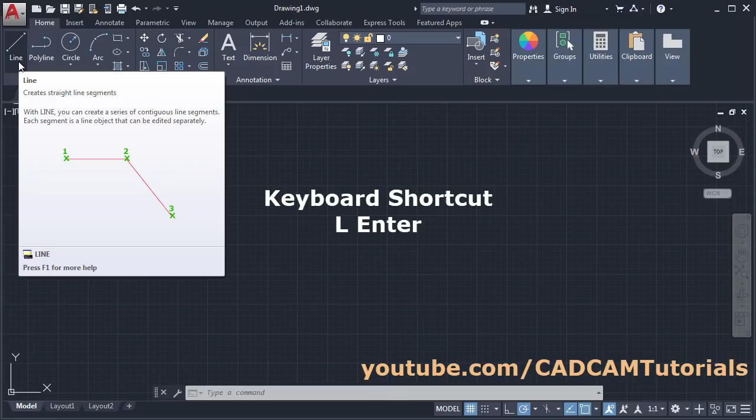Once you give the command, then you will have to read the message here. It is asking to specify first point. If the message is not shown at your cursor, that means your dynamic input is off.

If you want to show the message at the cursor, then you will have to make dynamic input on. To make the dynamic input on and off, you will have to click here on these three lines, customization, then click here on dynamic input.

Then it will show that dynamic input here. If it is in blue color, that means it is on, and if it is in black color, that means it is off. If I click on it, it will become off, then it will not show any message around our cursor.

For our series of tutorials, I recommend you to keep this on so that the message will be shown at the cursor. And if the message is not shown at the cursor, then you can read those messages from this command line area also.

Now in the line command, we will have to specify the first point, so you can click anywhere. I will click here, then take your cursor away. Now here it is showing the line horizontal automatically. It is showing it because our polar tracking is on.

If we make this off, then it will not show a straight line. To show that straight line, we will have to make this polar tracking on so that it will show a straight line also, and an inclined line also.

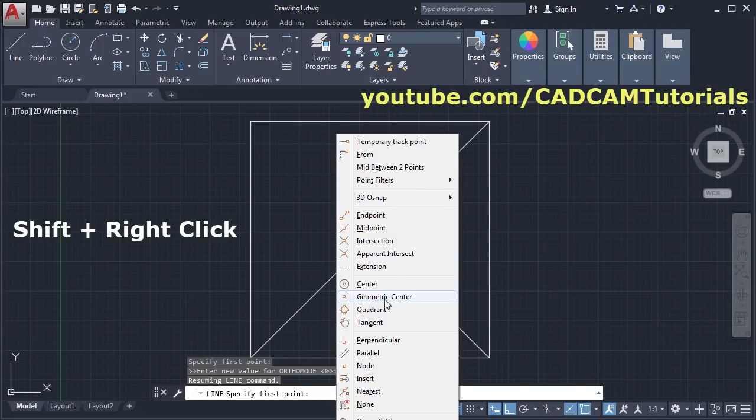Suppose I want to create lines from the midpoint of this line to the midpoint of this line. Again click on line, take your cursor here - it is not showing the midpoint. Again press shift and right click and select midpoint object snap. Then take your cursor here, it is showing midpoint - for midpoint it shows a green triangle. It shows different shapes for different object snaps. So click there. Now we are selecting object snap manually by pressing shift and right click.

But if you want to select the object snap automatically, click on this arrow near the object snap, and from here suppose I want to select this midpoint object snap automatically, click on midpoint, so it will add a tick there. That means it will select that object snap automatically. The object snaps which have a tick before them are selected automatically, and the ones without ticks need to be selected manually using shift and right click.

Then click outside and take your cursor here. Now it is showing midpoint object snap automatically. So once it shows the midpoint, you just have to click there.

And to stop the line command, press enter. So in this way you can select manual object snap or auto object snap.

If you want to remove some unwanted objects, then you can use the erase command. Keyboard shortcut for erase is E enter. Click on erase, then you can select the object you want to remove. Just click on them. Once you have selected all the objects, press enter, and those objects will be removed.

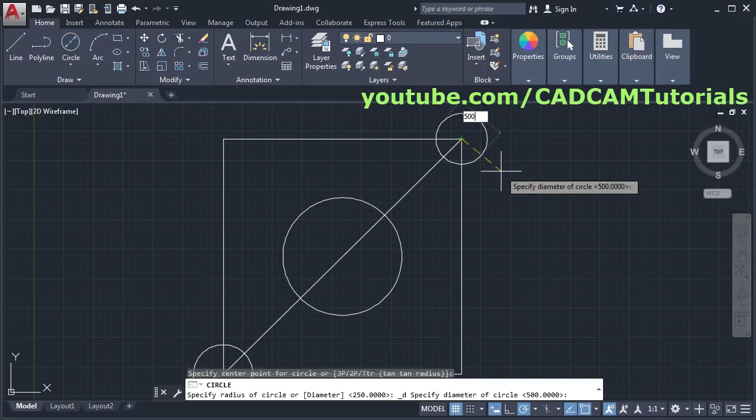If you want to zoom, for zoom plus rotate your middle mouse button or wheel of the mouse towards the monitor, and for zoom minus rotate the middle mouse button towards you.

Suppose I want to create one line tangent to these two circles. For that again click on line, then for selection of tangent object snap, press shift right click, and select tangent, then click on the circle. Again for selection of tangent here, shift right click, click on tangent and click on the circle. To stop the line command, press enter.

You can also select the tangent object snap automatically. Click on this arrow and click on tangent. Click outside, again take the line command, take your cursor here. Now it is not showing tangent object snap, but it is showing center. So we will have to turn off the center object snap. Click on center, so it will be turned off for auto selection. Then take your cursor to the circle, it is now showing the tangent. Click there, again click enter.

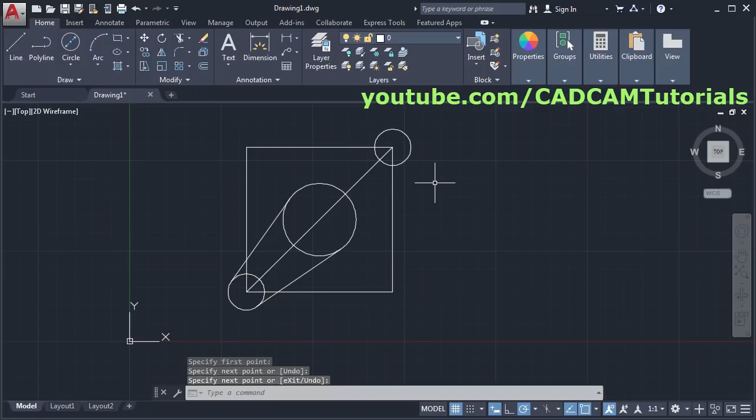If you want to repeat the previous command, press enter. Now it is repeating the line command. Again you can click the point and create the lines. Just enter to repeat the command and enter to stop the line command. So in this way you can create tangent lines.

If you want to create lines from the quadrant of the circle, you will have to make quadrant on. Then take the line command, take the cursor to the quadrant, and you can create lines from the quadrant also. Press enter.

If you want to cancel the last command, click here on undo. By clicking on this undo, you can cancel the last command. And if you want to bring back the object again, click on this redo. But for redo, you will have to click it immediately without giving any other command. If after undo you do some work, then it will not redo it.

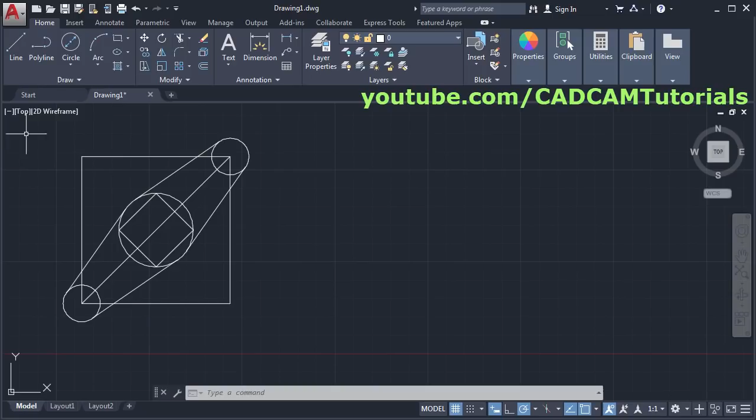The next topic is to create a line at an angle. For that we will open one reference drawing, this angle concept. In AutoCAD, the angle is measured in this way. If you are moving your cursor in the right direction, the angle is 0. The vertical line angle is 90 degrees and the line on the left side is 180 degrees. The same case is below: if you are going below, the angle is 90 degree. That means on the upper side 0 to 180 degrees and on the below side also 0 to 180 degrees.

Suppose I want to create one line at 30 degree angle. You will have to specify the 30 degree angle during creation of this line. Suppose I want to create one line in this direction and the angle is 30 degree from this 90 degree. Then I will have to specify the total angle from the 0, not just this 30 degree angle. If I specify 30 degrees, it will create this line and not that line. For creation of this line, you will have to specify the total angle of 120 degrees.

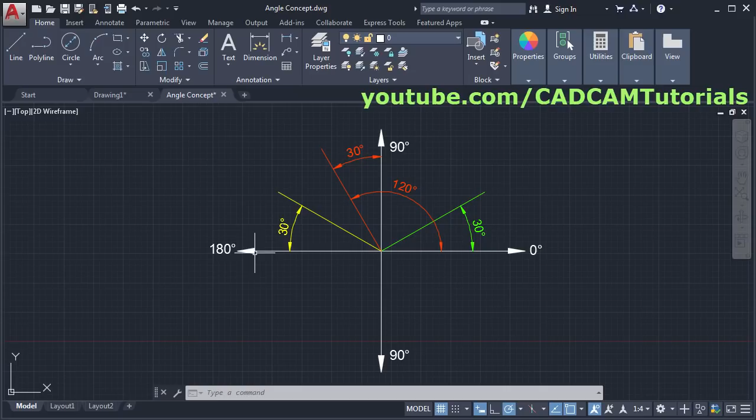Same way, if you want to create one line in this direction with angle required 30 degrees from this 180 degrees, you will have to specify this total 150 degree angle and not this 30 degree. That means you always have to specify angle with respect to 0 as per your requirement. Same is the case for below angles. If you want to go in this direction, you specify this 30 degree angle. Then if you want to go 30 degrees ahead of this 90, you will have to specify 120 degree angle.

If you want to go in this direction, you will have to specify a 150 degree angle, so the angle on both sides is the same.

The direction of your line can be decided by your cursor movement. Suppose I want to create a line from this point, and if you take your cursor above, the angle will be measured on the upper side, and if you take your cursor below, the angle will be measured from the bottom side. Suppose I want to create a line in this direction.

For angle, first you specify the length of the line. Suppose length is 20, then press tab on the keyboard for specification of angle. So press tab, and it will take your cursor to angle. Then specify the angle here, suppose 30, and press enter. So this line is created in this direction, like this green line.

Suppose I want to create a line in this direction at an angle of 30 degrees from this vertical line. Again, first specify the length, which is 20, then press tab. As I want to create the line at an angle of 30 degrees from this vertical line, I will have to specify the total angle, which will be 120 degrees. So specify 120 degrees here, and it will go in this direction. If you specify 30, it will again go in the same direction.

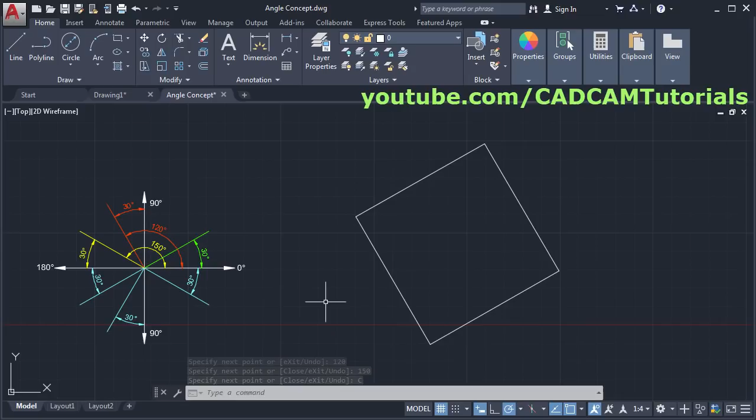If you want to save this drawing, click here on the save button, click on save. Then choose your desired location, I want to save in documents. Then give the desired name, suppose lecture 1, then click on save. So that drawing will be saved by that name in that folder.

And if you want to close this drawing, click on this X here. It will close that particular drawing.

If you want to start a new drawing, click here again and select the desired template so it will start the new drawing. And if you want to see a previously created drawing, click on this open button, click on open, then choose your drawing and click on open, so it will show the previously created drawing.

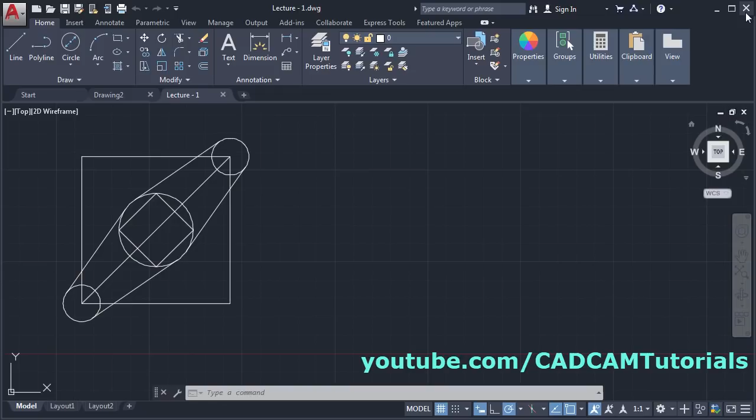And if you want to close AutoCAD, click here on this X. Then it will close AutoCAD. So that's all for now.

Now in this tutorial, we will learn how to create a drawing in imperial units, that is feet and inches, and we will also learn more basic commands. To create a drawing in feet and inches, click here and select acad.dwt, click on it.

Then give the units command. Type UN, enter. For feet and inches, you will have to select architectural or engineering. First we will see how to use engineering, click on engineering. Then from here you can choose the required precision. The insertion scale will be inches, and I will keep this precision as it is.

Then click on OK. Then we will create one line in feet and inches. Click on line, give the first point, take your cursor away, and for a straight line click on polar tracking. Suppose if I put a single number, that value will be in inches. Suppose if I put 20 here and press enter, it will be considered as 20 inches. We can check it, press enter to come out of the line.

Then to check the length of this line, make quick properties on, right now it is off. Click on it, it will become on. If in your case this quick properties button is not shown here, you will have to click on these three lines for customization, and click here. By clicking on it, you can make it visible or invisible.

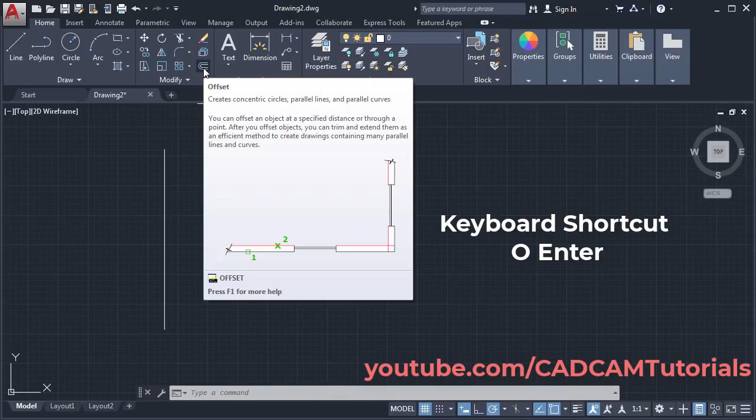Click on offset. Then you will have to specify distance. What is the gap between two objects? Suppose gap is 500. Then press enter. Then select object to offset. I want to offset this object. Then take your cursor on the side where you want the offset. Suppose I want offset on this side, so take your cursor on this side. You will have to specify the point on side to offset. For that you will have to click. Now this offset is created at a distance of 500.

Offset command is still running. Suppose if I again select this line, you can create offset at a distance of 500, or you can also change that value. Suppose now I want offset at a distance of 1000. So put there 1000 and press enter. Your offset is created at 1000 distance. Again select this line.

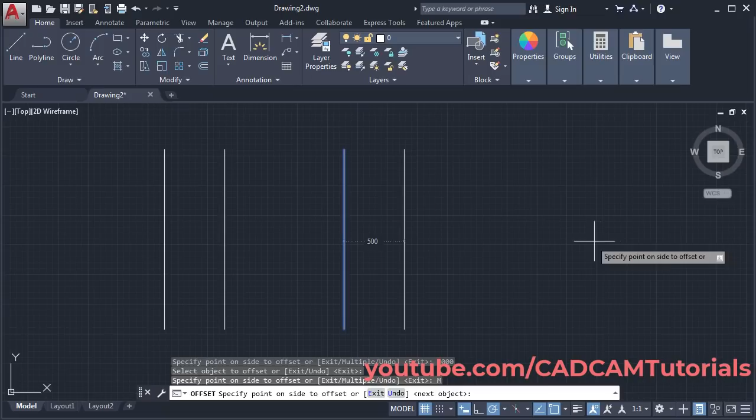Then if you want to offset multiple lines at a distance of 500, then you will have to click on this multiple option. Click on multiple. Take your cursor on the side where you want the offset and click, and you will have to keep on clicking. As many times you click, that many times it will create the offset. And if you want offset on this side, you can click on this side also. Then to stop the command, press enter. In this case, you will have to press enter 2 times. By first enter, it will come out of the multiple mode, and then by again pressing enter, it will come out of the offset command.

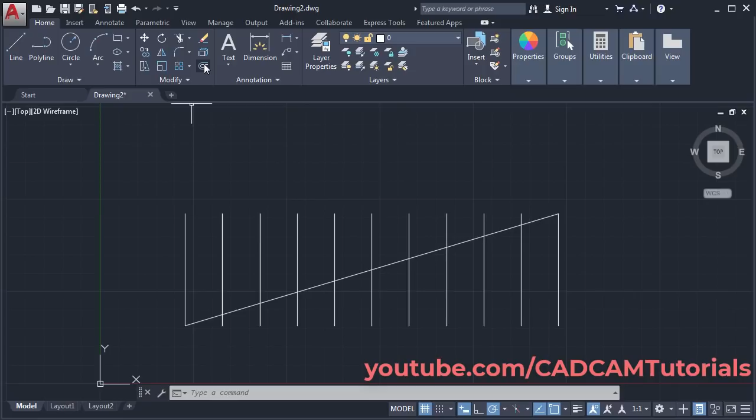Now we have created offset with some specified distance. Suppose I want to create offset by specifying a point. Then how to do that? That we will see. Suppose I will create one line from this point to this point. Press enter. Now I want to create offset by specifying a point. Suppose I want to create offset to this line passing through this point. And for that again click on offset. Then you will have to click on through.

Select the object to offset, then you can specify the point. I want the offset passing through this point, so just click on that point, and it will create an offset passing through that point.

This through option is also useful for creating variable length offset. Suppose if I click on this line, as you take away your cursor, the length changes. Here you can specify your desired length. Suppose I want 200, enter.

Again, suppose I want an offset at a different length, take it away. Suppose I want it at 500, enter. Again, suppose from here I want it above at 300. So in this way you can use this through option to create variable distance offset also.

If you want to create an offset and erase the original line used to create it, click on offset and use this erase option. Click on erase, then click on yes, erase source object after offsetting, yes. Then specify the distance, suppose 500, enter.

Select object to offset. I want to offset this object. Then give the direction where you want to offset and click. So here you will see that the original line got erased and only the offset line has been kept. Then press enter to stop the offset command.

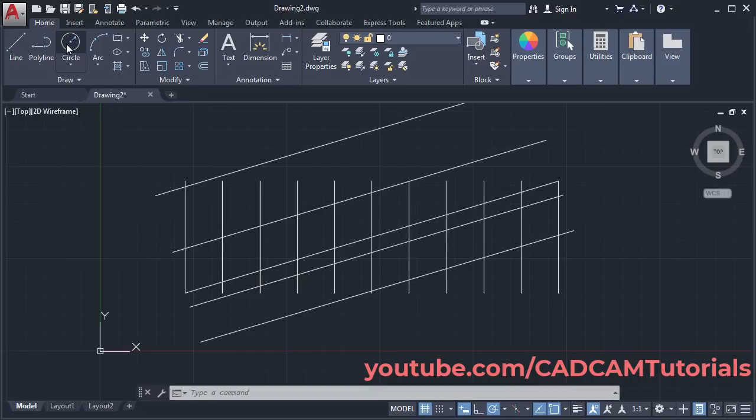You can also use offset to create concentric circles. Click on circle, give the center point, give the radius. Then if I offset this circle, click on offset, then give the distance 200, enter.

Select object to offset. I will select this circle. If you take your cursor outside of the circle, the radius will increase by that offset distance. And if you take your cursor inside the circle, the radius will decrease by that much distance. Then click inside. Now our erase option is on, so that outside circle got erased.

So first we will have to turn that off so it will not be erased. Press enter - you can repeat the last command by pressing enter. Press enter, click on erase, then select this no option.

Then again give the distance 200, enter, select the circle, then take your cursor outside and click. If you click outside, the radius will increase by the offset distance. And if you click inside, the radius will decrease by the offset distance. Press enter. So in this way you can use offset for creating concentric circles.

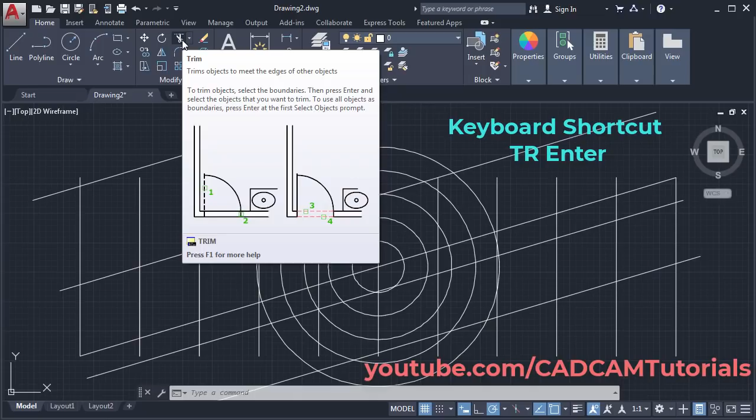Then I want to remove this arc above this line. If you want to remove or cut some object, you will have to use the trim command. The keyboard shortcut for trim is the first two characters, that is TR. You will have to type TR, enter.

Click on trim. Then for trim, first you will have to select the reference edges - that means the edges with reference to which you want to cut the object. So I want to cut with respect to this line, so I will select this line, then press enter.

Then select object to trim. I want to trim this circle. Click there, so that much of the circle will be trimmed. So now this line is selected. You can trim other objects also.

And if you want to trim multiple objects, you will have to click in empty space and take your cursor to the left side - that means click on the right side and take your cursor to the left side. So whatever object has been crossed will be trimmed. Click there, so three lines and this circle have been trimmed. Then to stop the trim command, you will have to press enter.

Then you can also define all objects as cutting edges. For that, click on trim, then to define all objects as cutting edges, you will have to press enter. Just press enter, so all objects will be defined as cutting edges.

Then you can remove any object. Just click on the object you want to remove, so that object will be trimmed. You can also use a crossing window. Just click on the object you want to remove, so it will be removed.

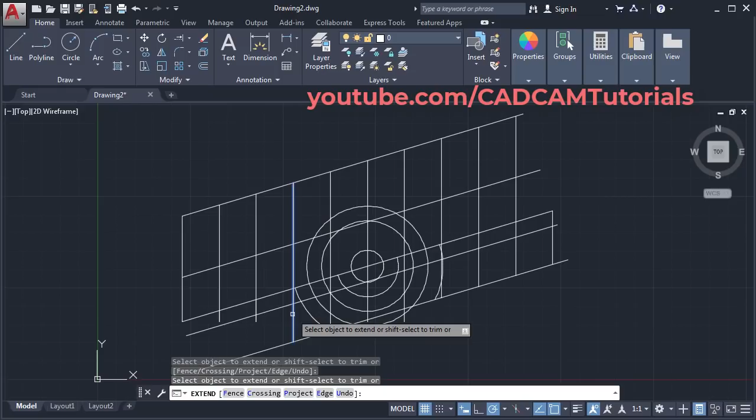You can also use extend as a trim. If you want to use extend as a trim, the process is same. You will have to press shift and then click on the object you want to trim. In this way you can use extend also as a trim. Then to come out of the extend command, press enter.

Suppose if you want to measure the length of this line, take your cursor to utilities, take your cursor on this arrow and click on distance. Then click the first point and second point of that particular line. Click outside. So here it is showing the actual length of that line.

Then it is showing length on the y-axis, that is vertical length of that line, and length on x-axis, that is the horizontal length of that line. And it is also showing angle from the x-axis.

Then if you want to see the radius of the circle, click on radius, click on the circle. It will show the radius and diameter of that particular circle.

For angle, click on this angle, then select the two lines for which you want the angle. Here the angle is shown as 73 degrees. Again click on angle, zoom minus to show it completely, and click on the two lines. Suppose I select this line and this line. So here it is showing the angle of 73 degrees.

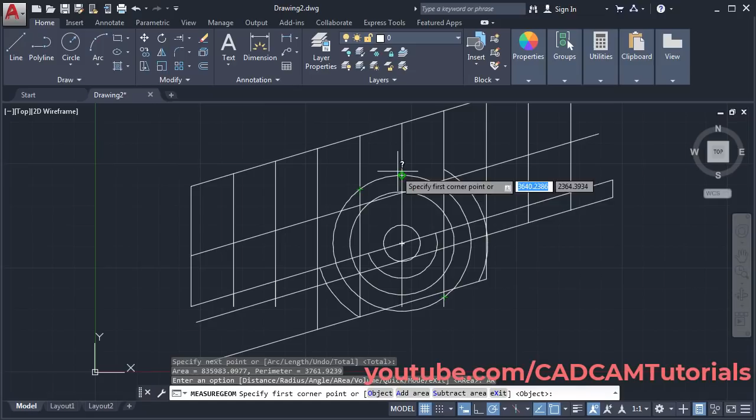And if you want the area of the circle, then click on area. Now for circle there are no points to click. Then for circle you will have to use this object option. Click on object and click on the circle. So it will show the area and circumference of that particular circle.

Then to come out of this measure command, you will have to click on exit. Then suppose if you want to calculate the area for the combination of arc and lines, we will see how to do that. Take your cursor to utilities, click on this arrow. From here also you can give directly the radius, angle and area command.

I want to measure area, then give the first point. I want to measure area for this shape. It contains two lines and two arcs. So we will start with this line. I will give this first point, this second point.

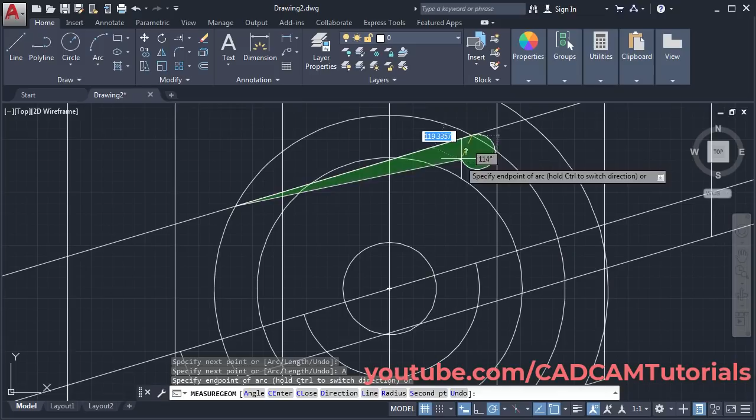Then there is this arc entity. To specify the arc entity, click on this arc option here. Then I know the center of this circle, so I will choose this center option, specify the center of the circle. Then to reverse the direction of the arc, here it is showing hold control to switch direction. Just press and hold the control, so it will switch the direction. Then click this point, release the control.

Then I want to specify this line. For that click on this line, then click this point, again click on arc. Then again I will choose this center option, give this point as a center. Then again press and hold control to change the direction and click on this point. Release the control and press enter. So now here it is showing the area and perimeter for this marked shape, the green shape. Then to come out of this command, click on exit.

Now in this version of AutoCAD 2020, they have added one more option for measurement, that is quick. Click on this arrow.

Here is the quick option. In quick option, you don't have to click anywhere. You just take your cursor to a portion and it will show all the parameters from that portion. So here you can view that it is showing all the angles and the length of the surrounding lines. Just take your cursor to the area where you want to do the measurement.

There is no need to click there, you just take it there and hold it for some time. Now it is showing the length of two lines, angle and radius. So this is a quick way to do the measurement, but it is available only in version 2020 and not available in old versions.

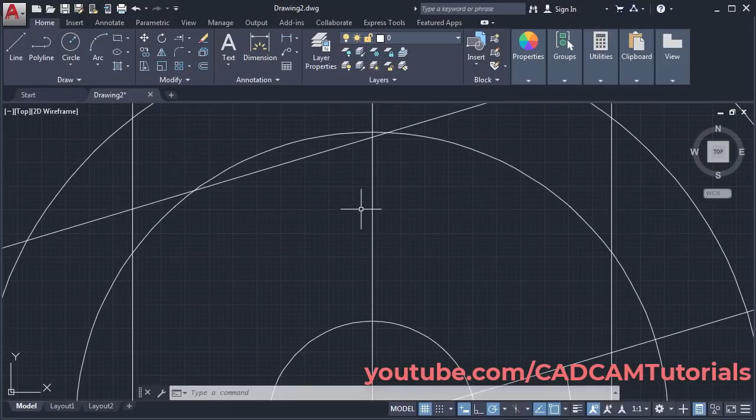Press escape to come out of the command. Then we have seen zoom and pan. For zoom, you will have to rotate your middle mouse button or wheel towards the monitor, so it will zoom plus. If you rotate the wheel towards you, that will make it zoom minus. Then if you press the middle mouse button and drag the mouse, it will pan.

And if you want to zoom extend, just double click the middle mouse button. It will zoom extend the drawing. Then there are some more commands.

Now here the navigation bar is not shown. To make it visible, click on view and click on navigation bar. So it will show the navigation bar. Click on home to come back to the original menu.

Then here some more zoom commands are there. Click on this arrow, there is zoom window. Click the first point, click the second point, and that much area will be zoomed. Then there is zoom previous, it will show the previous view.

Then there is zoom real time. For that you will have to press the first mouse button and drag the mouse. Then it will zoom plus if you take your mouse above, and if you take your mouse below by pressing the first mouse button, it will zoom minus. If you want to switch to pan, just right click and click on pan. Then press the first mouse button and drag the mouse, so in this way you can pan it.

Right click, zoom window is also there. Just press the first mouse button and drag the mouse, so it will zoom that much window. Again right click, zoom extend, and all the drawing will be shown in a single window. To come out, just right click and exit.

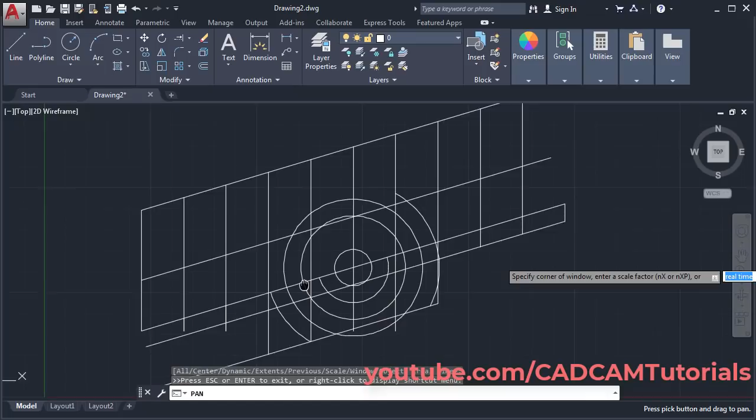You can give directly the pan command from here. Click on it, and from here you can pan it. Press the first mouse button and drag the mouse. Right click and exit, then escape.

That's all. In this tutorial we will learn the layer concept. In draw commands we will learn ellipse and polygon, and in modify commands we will learn fillet and chamfer. Let's start with layers. In this drawing you can see that different line types and different colors have been used.

To create a drawing like this, you will have to create different layers like this. So in this tutorial we will learn how to create these layers. We will start a new drawing using ISO template or acadiso. To create new layers, here is the layer command, layer properties. The command name is layer and the keyboard shortcut is LA, enter.

Click on layer properties. By default, AutoCAD works on the 0 layer. To create a new layer, you will have to click here, click on new layer, then you will have to give a proper name to the layer.

You can use the logic of line types, like giving the layer name as outline, center line, hidden line, or you can give a name as per the thickness you are going to use, like thickness 0.5, thickness 0.3. If you are creating a civil plan, you can give names like wall, window, doors. So the name you specify here should be meaningful. Suppose I will name it as continuous.

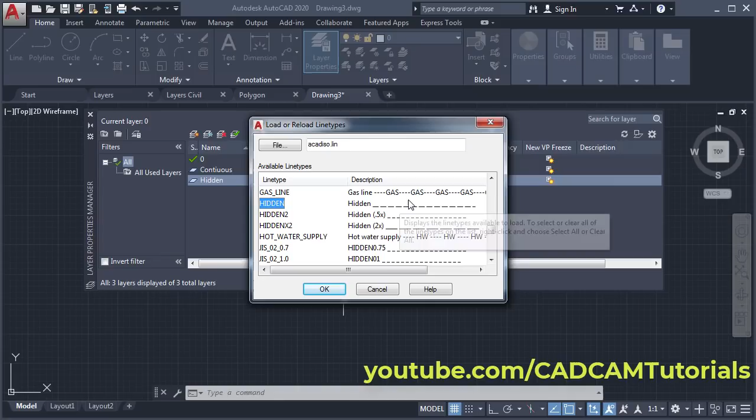Right now hidden line type is not available here. You will have to click on load, then scroll it down, and here is the hidden line type. There are three types of hidden lines: one with larger size, that is 2x, one medium size, and one smaller size. Suppose I want to use this medium size hidden line type, and click OK.

Then select hidden and click OK. Now our hidden layer has hidden line type, and I don't want any thickness, so click here and click on default, OK. Then I want to create one more line type, that is center.

For that again click on new layer, then give the name as center, then choose the color, OK. Then here line type required is center. Click on hidden, click on load, then scroll it down, and here is center. OK. Again select center and OK.

Now 0 is the AutoCAD default layer, and we have created three more layers. If you make any mistake during typing the name of the layer, you can change it. Just select that name, and after some gap click there again, so it will go into editing mode, and from here you can make any changes you want. Once you have edited the name, click outside, so that name will be changed.

And if you don't want any layer, you can delete it also. Just select the layer and click on delete layer. But the layer you want to delete should be empty, meaning no object should be created using that particular layer. If you have created any object on that layer, you will have to change the layer of those objects and make that particular layer empty. Then only you can delete it.

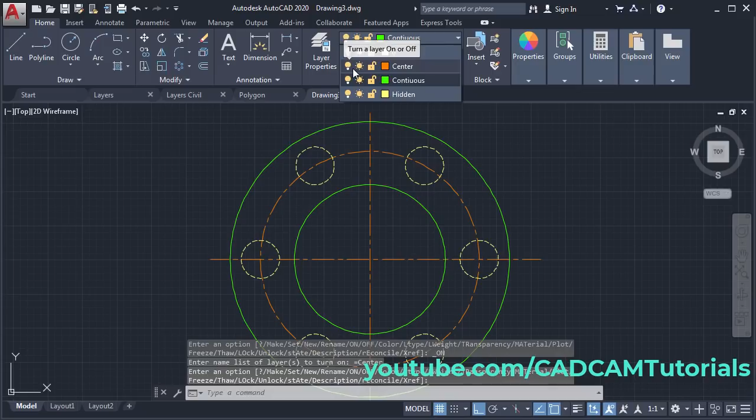Same way you can make any layer freeze or thaw. If you click on it, it will be made invisible again. But the benefit of freeze or thaw is that those objects will not be considered in regeneration. If you have a very large drawing, instead of turning it off, you should always use freeze, so that those objects will not be used in regeneration and your drawing will work faster. By clicking on it again, you can make it thaw or visible.

Same way you can lock some layer. Suppose if I lock this hidden layer here, then on a locked layer no modify commands work. Suppose if I say erase, select all the objects and press enter, so all the objects are erased, but the objects that were on the locked layer are not erased.

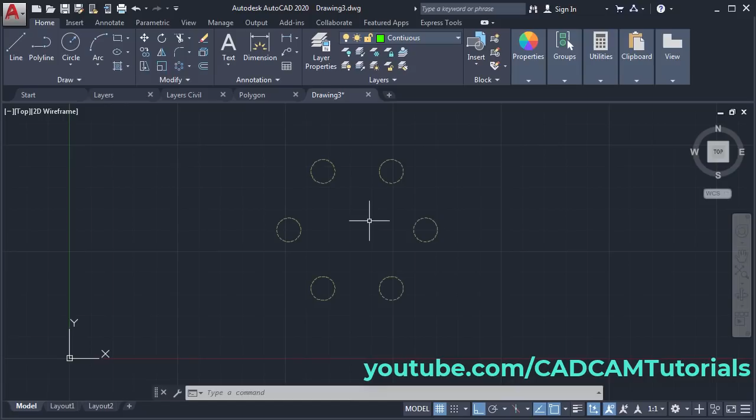By locking a layer, you can prevent accidental modification. If you want to take some drawing for reference, you can lock that and work on that particular drawing. To bring it back, I will just undo it, and from here I will make this hidden layer unlock. So in this way, you can use layer commands.

Next we will see the ellipse command. Here is the ellipse command, keyboard shortcut EL, enter. Click on ellipse, then you will have to specify the center of the ellipse. Suppose I want to create an ellipse here. Click there, then take your cursor away.

If you want to specify the axis of the ellipse as straight, you will have to make ortho mode on, and if you want to create an inclined ellipse, you will have to make it off. Suppose I want to make it straight, so I will keep it as it is. Then give the direction for which radius you want to specify - suppose horizontal radius. Take your cursor away and give the radius, suppose 700, enter.

Then it asks to specify distance to the other axis - here you will have to specify the other radius. Suppose I want the other radius to be 900, enter. So here a vertical ellipse is created.

Again click on ellipse, give the center point. Suppose I want to create an inclined ellipse, then I will make ortho off, take my cursor away, and specify the length of the axis, suppose 600. Then to specify the angle you will have to press tab on keyboard. Press tab, then specify the angle for the ellipse, suppose 45 degrees. Then press enter, then specify the radius of the other axis, suppose 1000.

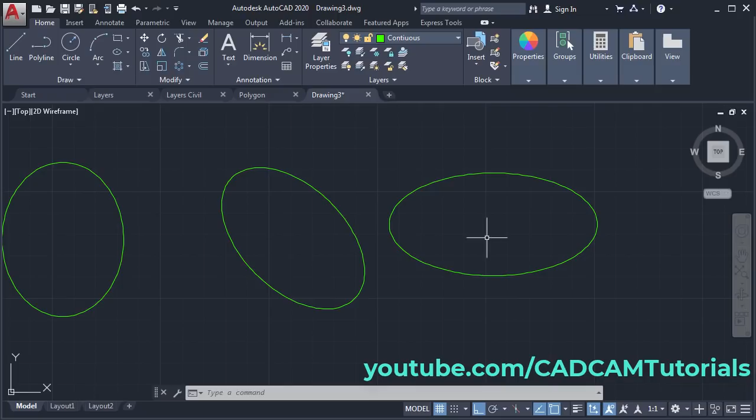Then next is polygon. Click on this arrow near the rectangle command, and here is the polygon command. Keyboard shortcut for polygon is POL, first three characters. Click on it, then you will have to specify number of sides. Suppose I want to create a polygon of 6 sides, type 6, enter. Then specify center of polygon. Suppose I want to create polygon here, so I will click there.

Then you will have to choose whether you want inscribe or circumscribe polygon. So how to decide what is our requirement or when to use which, that we will see. I will just press escape. And here is the polygon.

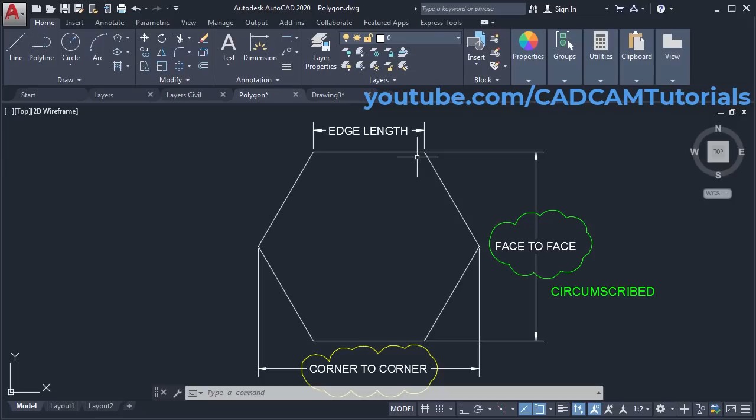So polygon dimensions can be specified in three ways. You can specify distance between two parallel surfaces, that is face to face, or you can define distance between two opposite corners, that is corner to corner, or you can directly specify the length of any one edge. In these three ways, a dimension can be given for polygon, so any one dimension will work. If the dimension given is face to face, then you will have to use circumscribed method. And if the dimension given is corner to corner, then you will have to use inscribe method. And for the edge length, edge method needs to be used. So in this way you can decide which method to be used based on the dimensions.

I will create one polygon, click on polygon. When you use some command, it comes on the top automatically. If we click on this arrow, we can see that polygon is the second command and rectangle is first command. But we have clicked there previously, therefore it came on the top automatically. So click on polygon, then specify number of sides.

Suppose I will give you 6 here, press enter. Then specify center of polygon. Suppose I want to create polygon by inscribe in circle method, click on it. Then take your cursor away. Make this ortho off so that it will show the message near the cursor. If message is not shown near the cursor, then you will have to see in this command line. Then specify the radius of the circle. If you observe it closely, the radius is specified from the center of the polygon to the one of the corner of the polygon. Then give the radius, suppose radius is 800, enter. So here this 800 distance is given from center of the polygon to the one of the corner of the polygon. That means this total length will be double, that is 1600.

Again click on polygon, then specify number of sides. Again I will give 6, enter. Then give the center point. Then next is circumscribed about circle. Click on it. Here you can observe that radius is specified from the center of the polygon up to the midpoint of your edge. Then specify the distance, I will give here 600, enter. So this 600 will be from the center of the polygon to the midpoint of any of the edge. That means total distance between two parallel lines will be double, that is 1200.

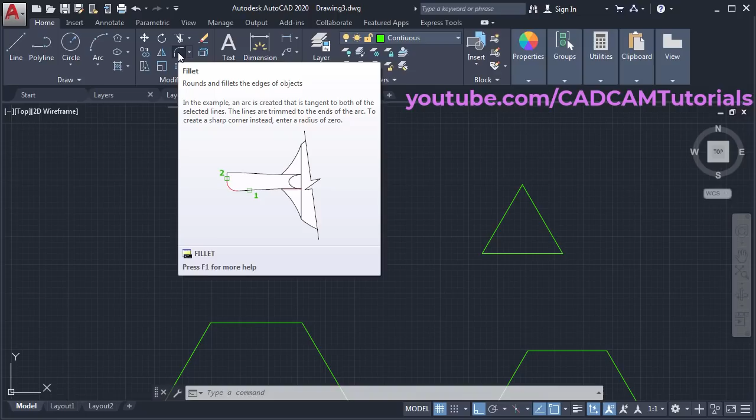Click on fillet, then select the first object. Suppose I want to create an arc between these two lines. I will select this line as the first object. Then you will have to specify radius. To specify radius, click on radius here, then give the radius. Suppose I want radius of 200. Enter. Then select second object. So in this way it will create an arc between two lines.

Again click on fillet. The keyboard shortcut for fillet is F, enter. Click on fillet.

Then there is one option called polyline. Using the polyline option, you can create fillet at all the corners of the polyline. As we have created this square, or we have created this triangle using the polygon command, whatever object is created by the polygon command is a polyline. So we will use this polyline option on this triangle. Click on polyline, then select this polyline.

We have set the radius of 200, so because of that distance it is actually creating a circle. So we will reduce the radius. Click on radius and make it 50, enter. Then take your cursor to this polyline. Here you can see that it has created fillet at all the corners. So if you have a polyline object, you don't have to use fillet multiple times. You just choose the polyline option and click on the object, and it will create a fillet for all the corners.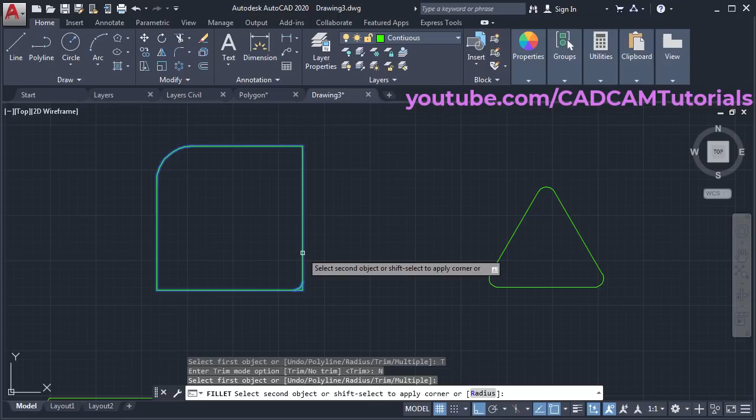Then there is this trim option. Here you can observe that the extra lines have been removed, because the trim option is on. If you want to keep those lines, click on trim, click outside, and click on no trim, so it will not trim the lines. I will select this line and this line. Here you can observe that the lines have been kept as is and the fillet is also created.

Again give F, enter. I will cancel this trim option. I will select trim again, so it will trim the lines.

Then there is one more option, multiple. If you want to fillet with the same radius for multiple objects, you don't have to give fillet again and again - you can choose this multiple option. Click on multiple, and we will change the radius also. Suppose I set the radius to 200, enter. Then you can select the object - click on first object, second object. Suppose here also I want to create some fillet. It will not stop until you press enter, and you can create fillet with the same radius as many times as you want. To stop, press enter. So in this way you can use the multiple option.

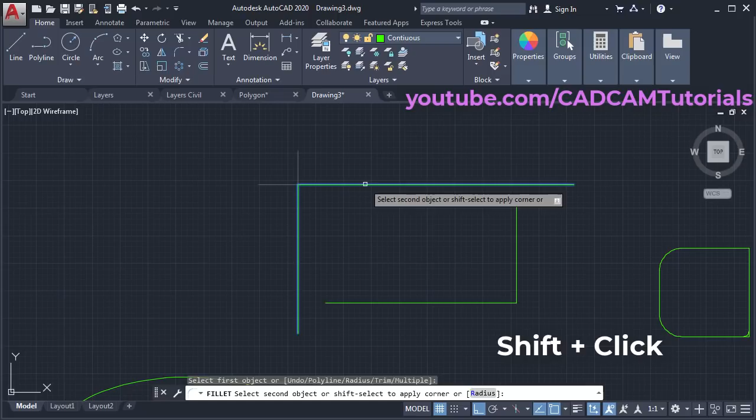Fillet is also useful to create corners or extend a line automatically. Suppose I have some object - now I have this object. Suppose I want to trim these two lines and create a corner here. For that you can use fillet. Click on fillet, then select the first object. If you take your cursor to the second object, it will create the fillet, but I don't want to create a fillet, I just want to create a corner. So for creation of a corner, just press shift and click. It will create the corner and not the fillet. Now these two lines have been trimmed.

Same way it will extend also. Suppose again I will give fillet, and I will choose this multiple option so I don't have to give fillet again and again. Fillet, then select this line, press shift and click. In this case this line has been extended and trimmed, and the corner has been created. So in this way, by pressing shift, you can create corners. This is how you use the fillet command.

And in the set of fillet tools there is one more command - click on this arrow, which is chamfer. The keyboard shortcut for chamfer is CHA, enter, the first three characters. Click on chamfer.

Most of the options are same as we have seen in fillet. Undo, polyline, trim and multiple, those are the same as we have seen in the fillet command.

For a chamfer, select first line. Then here you can specify angle or distance. Suppose I want to specify distance, click on distance, then specify first chamfer distance - that means chamfer distance on this first selected line. Suppose I want it to be 200, enter. Then specify chamfer distance on second object. You can keep the same and directly place here enter, or you can give different also. Suppose I want to keep it same, I will press enter, then select the second object. So here chamfer is created.

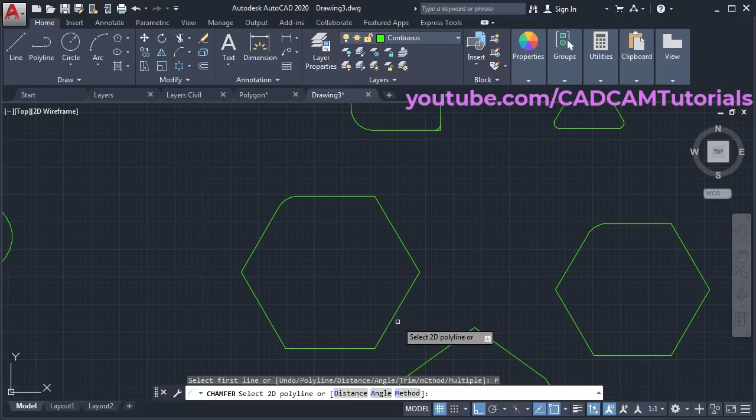And the polyline option is same, just we will try it. Suppose here chamfer, click on polyline, and now that angle is creating problem, we will choose this distance option and set the distance of 100, enter. Then other chamfer distance is 100, select this object. So here chamfer is created. So in this way you can use the chamfer command.

That's all. In this tutorial we are going to learn all the options from the circle command. Then we will learn about hatch, then mirror and object snap tracking. If you are interested in previous tutorials from this series, then link to the complete playlist is given in the description.

Click on the arrow below the circle command. We have already seen how to create circle using center radius method. Then next is center diameter. Click on it. In this, at first you will have to give the center point for the circle. Click center point, then take your cursor away. Then you will have to specify diameter of your circle. Suppose diameter is 400, enter. So it will create circle of 400 diameter.

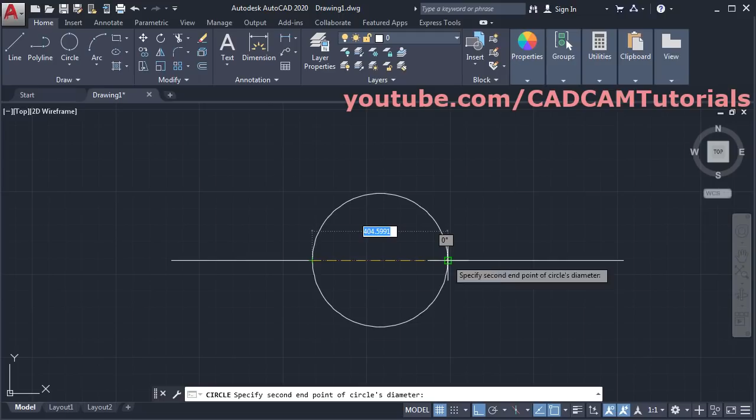Then next is 2-point circle. Suppose I will create one object, suppose I have this line and one more line. Suppose I want to create one circle passing through these 2 points. Click here and click on 2-point option. Then click first point - first point will be end point of this line. Click there, then click on this end point. Same way, suppose I want to create circle passing through these 2 points - again click here, select 2-point, click on this end point and this end point.

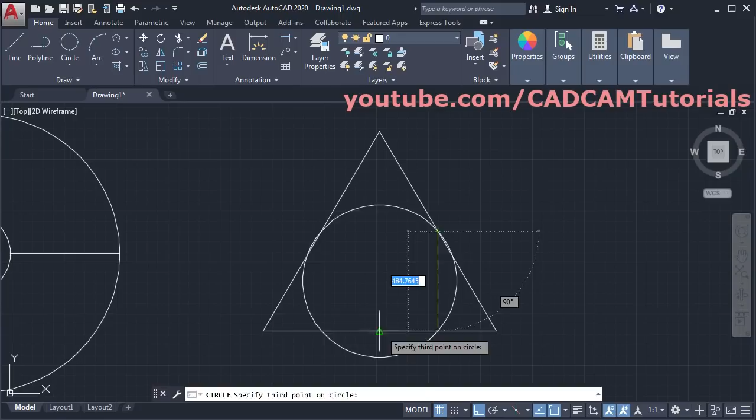So in this way you can create circle passing through 2 points. Then next is 3-point. Suppose I will create one triangle using the polygon command. I will give number of sides as 3, enter. Then I will use this edge method. Specify first endpoint, take your cursor away and click. Suppose I want to create a circle passing through 3 midpoints of this triangle. For that, click here and click on 3-point. Then first point will be the midpoint of this line. Click there, click here, click here. So in this way it has created circle passing through these 3 points. Same way you can create circle passing through these 3 points.

The command you have used comes automatically on the top. If you want to use that command again, there is no need to click on this arrow - you can directly select that command from here. Click on 3-point and select these 3 endpoints. So in this way you can use the 3-point circle.

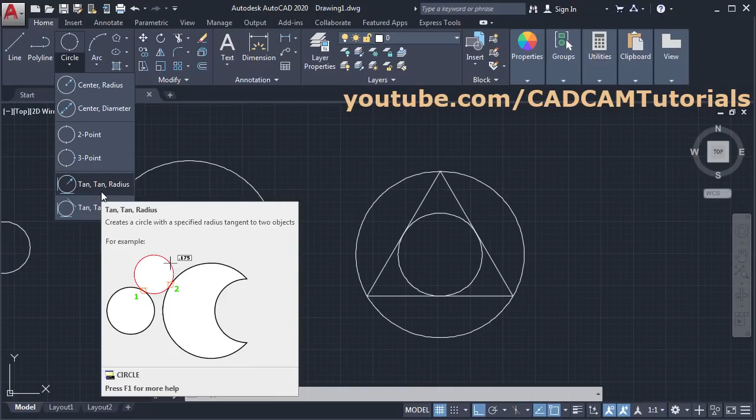Next is tan tan radius. Using tan radius you can create circle tangent to two objects. Those two objects can be either two lines, two circles, or one line and one circle. Click on it. Suppose I want to create circle tangent to this circle - click on this circle and tangent to this line, click on it. Then you will have to specify the radius. Suppose radius is 400, enter. So here it has created a circle tangent to this circle and this line.

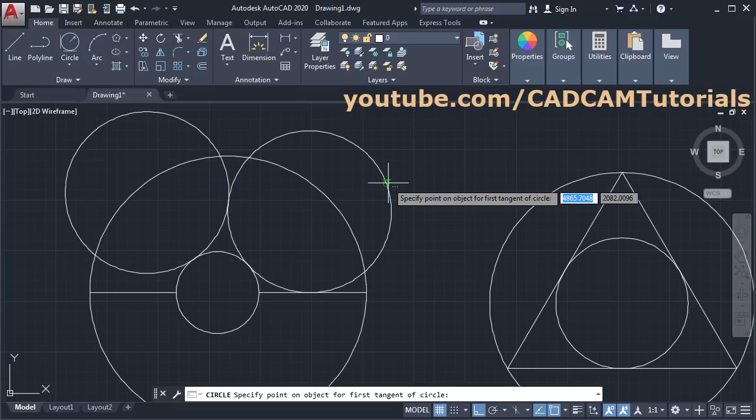Same way you can create circle tangent to two circles also. Click on tan radius, then click on this circle and this circle. Then give the radius - I will keep 400 as it is, press enter. So in this way it has created circle tangent to this circle. Now it has created circle tangent in this way. Suppose I want tangent circle from outside like this - for that you will have to specify tangent point in that particular area. Again click on tan radius. If we create circle from outside, then that circle will roughly touch in this area. So click one point in this area and other point in this area.

Then specify the radius. Suppose radius is 1200, enter. So here it has created circle from outside. In this way you can use the tan radius command.

Next is tan tan tan. This will create a circle touching three objects. Those can be three lines, three circles, or a mix of them. Click on tan tan tan. Suppose I want to create one circle tangent to this circle, click on it, then this line and this line. So it has created a circle touching these three objects.

Same way, suppose I want to create a circle tangent to these three circles. Click on this one, this one, this one. Then click on this circle and this circle. So in this way you can use different options from the circle command.

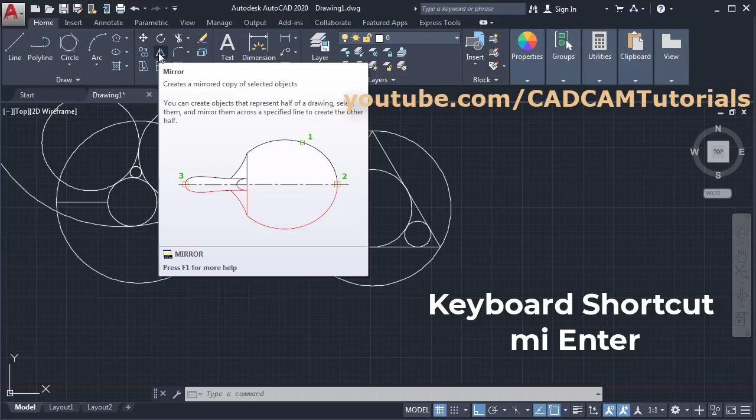Next is the mirror command. Suppose I want to mirror this object on the opposite side, on this side. For that, click on mirror. Keyboard shortcut for mirror is MI enter. Click on mirror, then select the object you want to mirror. I want to mirror all these objects and press enter.

Then specify the first point of the mirror line. I want to mirror it around this line, so take the first point of this line. I will take this intersection point and this intersection point. Then specify whether you want to erase the source object. Here I don't want to erase the source object. If you click yes, the previously selected objects will be erased, but I don't want to do that, so I will click on no. So in this way this object has been mirrored around this line.

We will try one more time. Click on mirror, then select the object you want to mirror. Enter. Suppose I want to mirror around this line, so I will give the first point here. Then take your cursor below. If you want the mirror line to be straight, you will have to keep ortho mode on. Then give the second point. Again I don't want to erase the source object, so I will click on no.

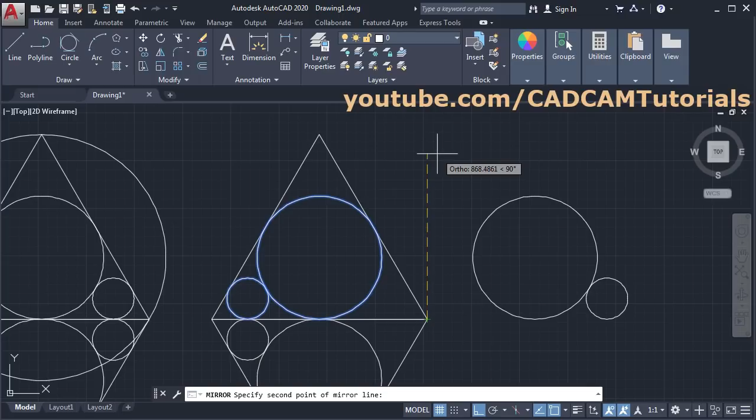We will also see what happens if we erase the source object. Suppose again I will click on mirror, then select this circle and this circle. Enter. I will give this endpoint as the first point of the mirror line, take my cursor above to specify the second point, and for erase source objects I will click on yes. So it has erased the original object and kept the mirrored objects. In this way you can use the mirror command.

Next command is hatch. Keyboard shortcut for hatch is H enter. Hatch is useful to create hatching lines. If you create any section, click here, then at first click here and select your desired hatch pattern. They have provided these ANSI hatch patterns. Then hatch patterns starting with AR are the architectural hatch patterns.

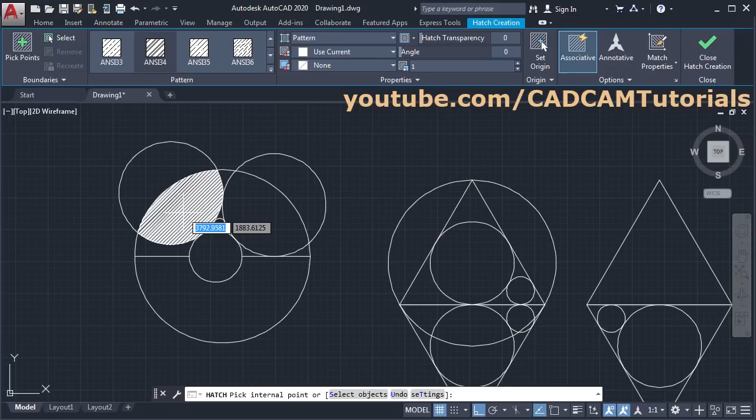In architectural, there are brick patterns, then concrete, then sand. If you scroll down, different patterns have been given, then there is gravel. So at first I will choose this ANSI34. Then take your cursor inside the object where you want to place the hatch and click there. Now here it has created this hatch pattern.

If you want to increase the gap between these lines, you will have to increase this scale, the hatch pattern scale. Click there and increase it. I will make it 5, then press enter. So here the gap between lines is increased.

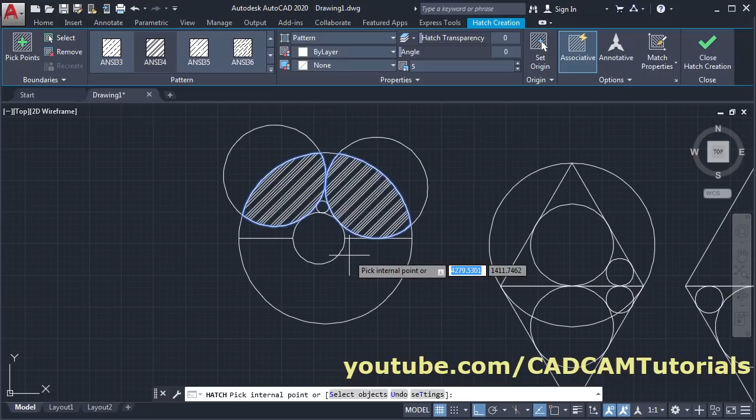The hatch command is still running. You can click inside as many objects as you want, only ensure that the object is visible. If some object is not visible, it will not create the hatch. If I try to click here, now it is not showing the preview. In that case, you will have to zoom out and ensure the complete object is visible. Then click there, and only then it will create the hatch.

And if you want to reduce the gap, you will have to reduce the scale. Suppose if I make it 2, the gap will reduce. Suppose I will keep the 5 value, enter. Then if you want to change the angle of the lines, here you can specify the desired angle. Now this angle is considered as 0. Suppose I want to make it vertical, then here you will have to specify an angle of 45 and enter. So after specifying 45 degrees, it will make it vertical. And if you want to make it opposite, you will have to give the angle of 90, enter, then it will create the opposite hatch.

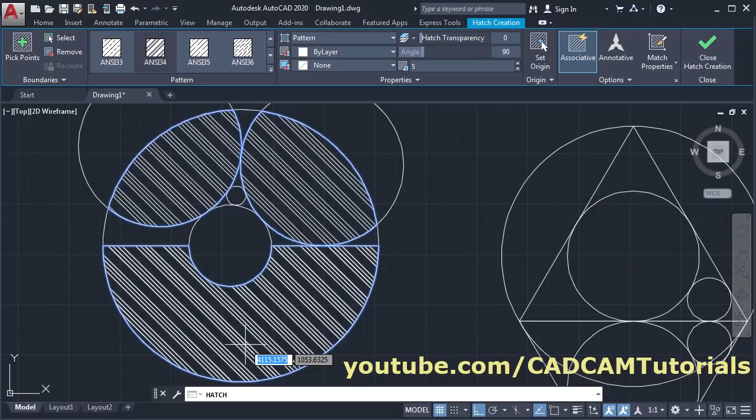Then if you want to change the color, click here, and from here you can choose your desired color. And if you apply some background color, from here you can choose the background color.

If you are not happy with the layout of the lines, you can set origin also. Click on it, and suppose I will give origin here. So here you can view that the lines are shifted. So just click on set origin and give the origin. So in that way you can shift the pattern also.

Once all your settings are done, then click on close hatch creation. So that hatch will be created.

And if you want to edit this hatch, or if you want to edit an existing hatch, then take your cursor on the hatch. Once it gets highlighted, then click on it. So it will bring this hatch editor again. Then you can make any changes you want.

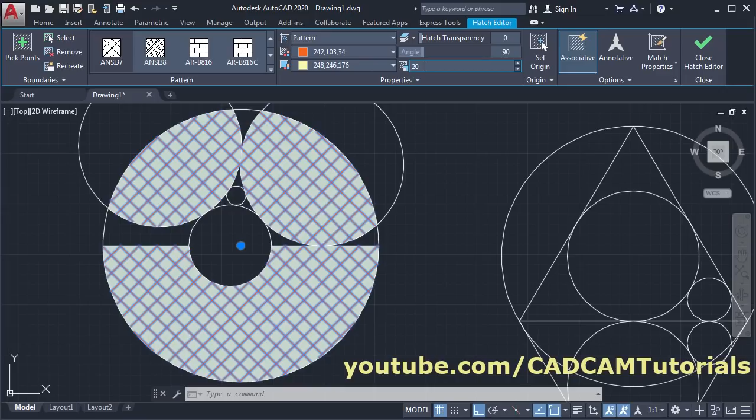Suppose I want to change the hatch pattern to this one. So as per that, it has been updated. Suppose I want a larger scale, I will make it 20. Once you have done all the changes, just click on this tick. So it will update your hatch.

Then if you want to give hatch of a single color, then for that again click on hatch, then click here, scroll it up, and click on this solid if you want to fill a single color. Click on solid, then click the area where you want to create the hatch, and from here you can change the color.

Suppose I want to create it inside all these objects. And if you want to create hatch by selecting an object, then for that you will have to click on this select boundary objects. Click on it and select the object inside which you want to create the hatch. Now after selecting this circle, it has changed the hatch area.

Now you can control your hatch area by clicking on these options here. Right now here outer island detection is selected, therefore it has created hatch for the outer objects. Same way, if you click on this arrow and select normal island detection, in this case it will not make any changes. But if you are inside loops, then it will give hatch to alternate loops.

And if you don't want to consider any objects, then click on this ignore island detection. So it will hatch all the objects. Then click on OK. So in this way here hatch is created.

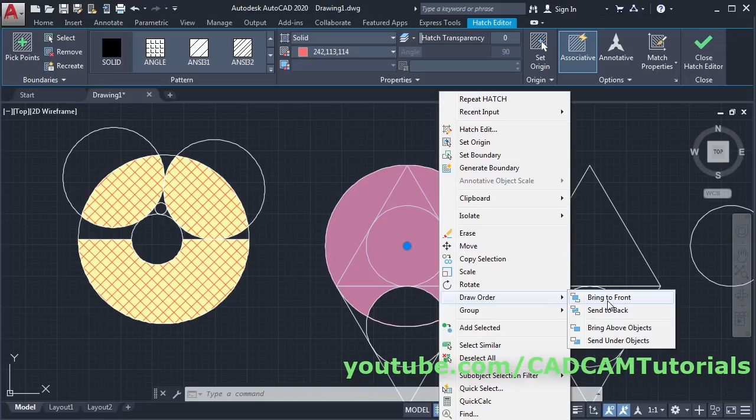And if you want to bring hatch ahead of these objects, then click on this hatch, then right click on it, then click on this draw order and click on bring to front. So all the objects will go behind your hatch.

And if you want to make your hatch transparent, then click on this created hatch, and from here you can select your transparency. As you make it transparent, the objects below the hatch are visible. Click on OK. So in this way you can make your hatch transparent also.

Same way, if you want, you can give gradient hatch also. For gradient hatch, click on this arrow and click on this gradient.

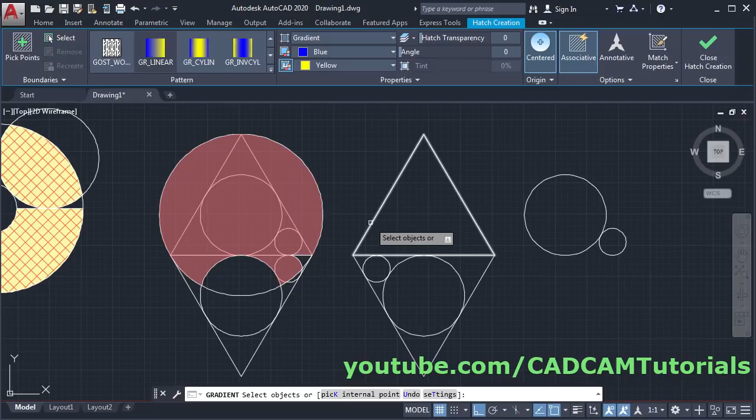Then right now our select object is on, so I will select this object. Then from here you can select the layout for your gradient, and from here you can choose your desired colors.

Then from here different patterns are available for the gradient. You can choose your desired pattern and click on OK.

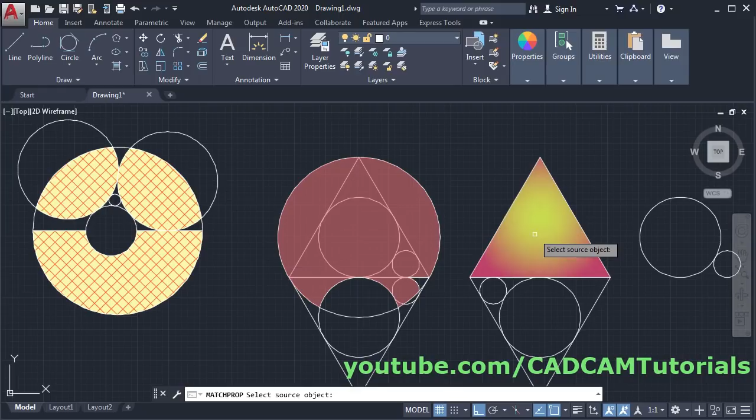And if you want to match two hatches, suppose here I want this hatch, then you can use match properties. Take your cursor to properties and click on match properties. Then select source object, I will select this hatch. Then for destination objects, I will select this hatch and press enter. So in this way you can match hatches using match properties.

And these hatches have been created as associative. If you click on this hatch, you can see here the associative option, it is on by default. Therefore, whatever hatches you create, those are associative.

Now what happens because of this associative? Press escape. If you change the shape, as per that your hatch pattern will also change. If I click on this triangle, click on this grip and take it above, so as per that your hatch is updated. So that is associative.

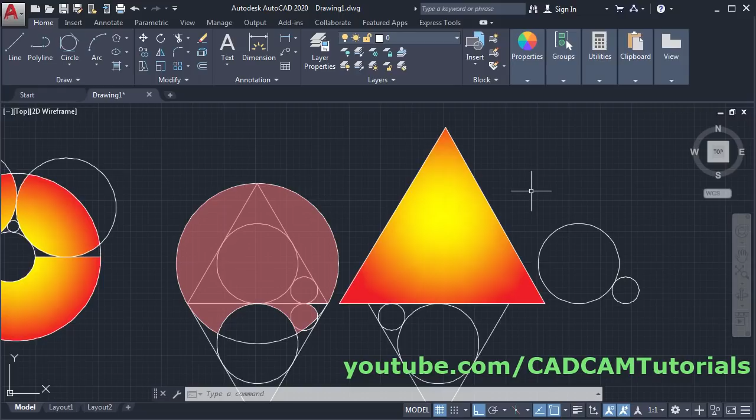Press escape. Now here I have created this hatch using the single hatch command. Therefore this complete hatch is connected and single. Suppose if I want to change this hatch and keep this hatch as it is, then I will have to separate hatches. To separate this hatch, click on options and click on separate hatches. So each hatch will be individual.

Then click on OK. Now here you can select this hatch and you can change its pattern. Suppose I want honey here. Now it is not visible. I will have to increase the scale. I will make it 10, enter.

And you can change the background color or object color and click on OK. So in this way you can use the hatch command.

Next is object snap tracking. Object snap tracking is useful to locate points with reference to other points. Suppose I create a rectangle, and I want to create a circle at its center. Normally I would have to create a line from the midpoint of this line to this line, and then at the midpoint of that line create the circle. But using object snap tracking, you can locate this center point without creating any reference objects.

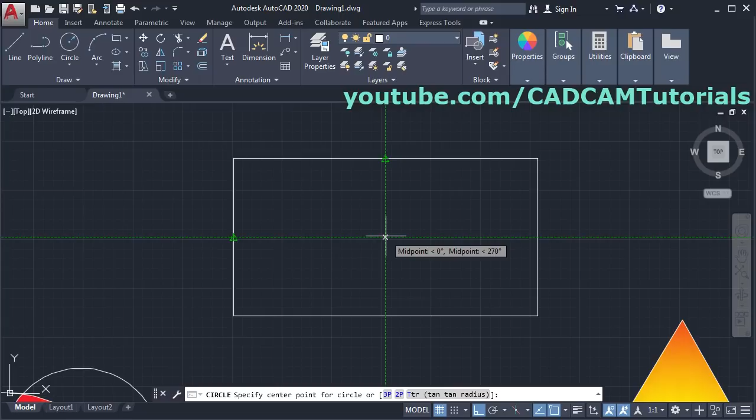Then take your cursor to this midpoint, hold it for some time, take it away. So both points are marked for tracking. Then take your cursor to the center, so it will locate the center point. Click there and give the radius. So in this way we can locate the point using other reference points.

This object snap tracking is also very useful to create projected views. Suppose this is a top view, and using this top view I want to create the front view. How do we do that? Click on line, then take your cursor to this endpoint, take it away and click.

Now the length of this line will be the same as the length of this line. Take your cursor to this endpoint, take it above and click. Then take it above, give the length, enter. Then again take your cursor to this endpoint, take it above and click. Click on this endpoint, enter. Then press enter to repeat the last command.

For this portion, take your cursor to this quadrant, take it above, click on this intersection point, take it above, give the height. Then again take your cursor to this quadrant, take it above, click, and now if you click here it will connect it to the midpoint.

So what you can do is take your cursor to this midpoint, zoom it in, take your cursor to this midpoint and take your cursor to this side. Now it is tracking that midpoint. Click there and press enter. So in this way you can use object snap tracking for creating projected views.

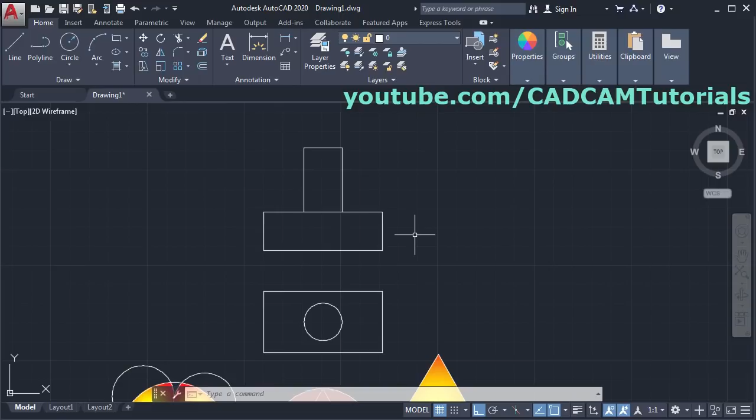That's all. In this tutorial we are going to learn dimension. If you are interested in the previous set of tutorials, a link to the complete playlist is given in the description.

This dimension command contains all these commands, meaning any one of these commands you can directly give from this single command. Therefore, this command is faster to use. And if you want to learn how to use these individual commands, a link to that tutorial is also given in the description.

This dimension command was added in AutoCAD 2016. If you are having a version lesser than 2016, this command may not be there. Click on dimension,

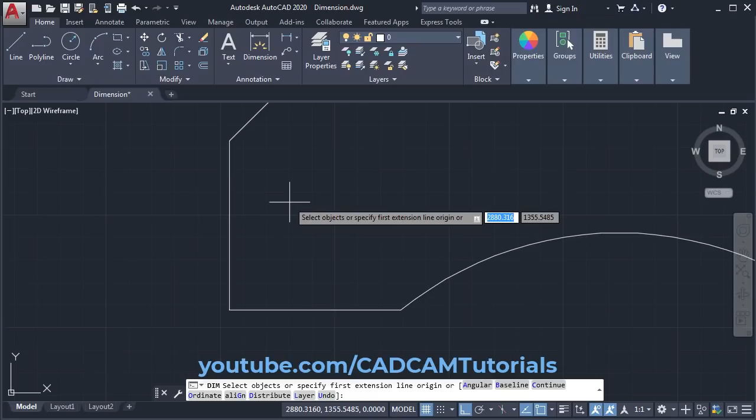then zoom here. You can use this command in two ways: you can directly select the object, or you can specify the first extension line origin. But to use this command more effectively, using select object is recommended, because specifying the first extension line origin will only create horizontal, vertical, or aligned dimensions and will not create other types of dimensions.

Take your cursor to the object you want to give dimension to, and it's recommended that when taking your cursor on the object, don't place it on any object snap, otherwise it will not select that object. Take it to the space where there is no possibility of any object snap. Then click on the object, take your cursor below and click. So here this dimension is created.

Zoom minus. Now this dimension is very small. To increase the size of this dimension, you will have to click on annotation, then click on dimension style. The keyboard shortcut for dimension style is D, enter.

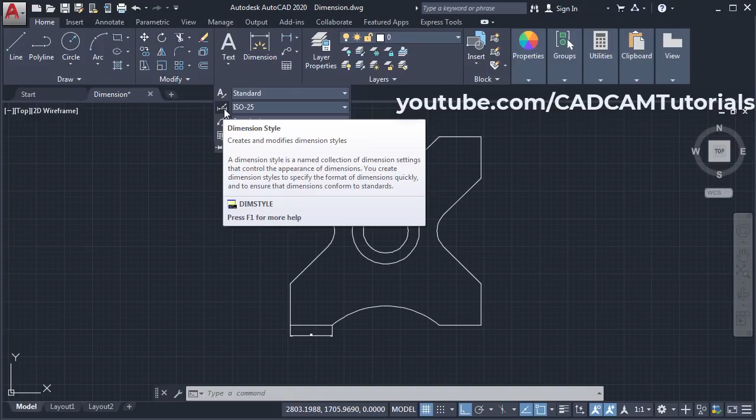Click on it, click on modify, click on fit. Then you will have to increase this scale here. Use overall scale of, I will make it 5. OK, close. Now this dimension is properly visible.

Again, we will give the next set of dimensions. Click on dimension.

Take your cursor on the object. Click, take it outside and click. Then we will give dimension for this inclined line. Click on it. Now here you can see it is showing vertical or horizontal dimension, not aligned dimension. This happens because ortho mode is on. So when you want to give aligned dimension, you will have to make ortho off. Click on it. Now it is showing aligned dimension. Click.

Then take your cursor on this circle. If you take your cursor on the circle, it will show diameter dimension. And if you take your cursor on the arc, it will show radius dimension. Suppose I take my cursor on the circle. If you take it inside, it will give dimension this way. And if you take it slightly outside, it will give dimension this way. So I want to give it this way, so I will click here. Then give the position for the dimension. Click.

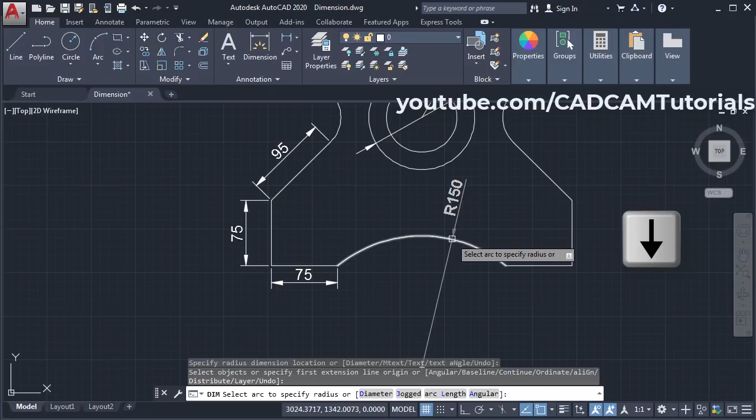Same way, if you want to specify jogged radius, take your cursor on the arc. Here the jogged option is shown. You can select this option by typing the blue letter in that option. So in jogged, J is blue, so you can type J, or you can also press the down arrow key and select the option. Suppose we press the down arrow key and select the option from here. Click on jogged, then take your cursor on the arc and click on it.

Then you will have to specify center location override. This jogged option is useful when the center point of your arc is too far from the arc and it goes outside your drawing sheet. So I will specify my override location here, then specify the dimension line location. While specifying the dimension line location, you can control the size of the jog. Suppose I want the jog size to be this much, so I will click there. Then you will have to specify the jog location, take your cursor below and click.

And if you want to specify the arc length, take your cursor on the arc, then again press the down arrow key and click on arc length. Then take your cursor on the arc, click there, take it above and click.

Then if you want to give the angle between two lines, click on the first line, click on the second line. Then specify the position of your angle dimension. Suppose I want it on this side, so click there. In this way you can add angular dimension.

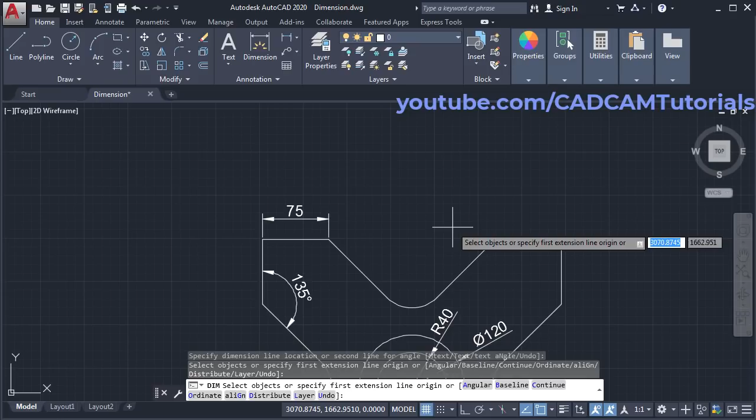Then if you want to give dimension in one line, you will first have to specify one dimension. You will specify this dimension, click on the line, take your cursor above and click. Then to give dimension in one line, you will have to choose this continue option. Click on continue, then specify the first extension line origin to continue. If you click on this side, you can create a continue dimension on this side, and if you click on this side, you can create a continue dimension on this side. I want to create continue dimension on this side, so I will click here. Click, then take your cursor on this side and specify the second extension line origin, clicking on this endpoint and this endpoint. Then to stop the continue option, you will have to press enter two times, one and two. Then you come out of the continue option.

Then if you want to specify dimension from one line, you will have to use this baseline option. Click on baseline. Then again specify the first extension line origin as baseline. If you want to specify dimension from this extension line, click on this side, and if you want to specify dimension from this extension line, click on this side. I want to specify from this extension line, so I will click here. Then specify the second extension line origin, clicking here and here. Then press enter two times to come out of the baseline option, one, two.

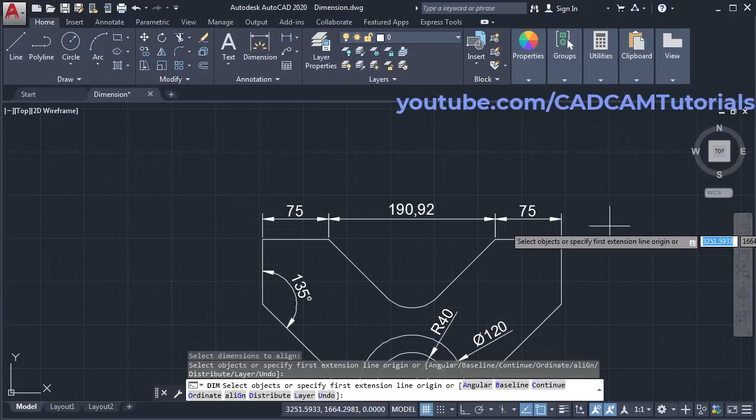So all these dimensions have been aligned. Then next is this ordinate option.

Click on ordinate. Then I want to give ordinate dimension for this point. Click on this point. Then if you move your cursor in the horizontal direction, it will give the Y position. And if you move your cursor in the vertical direction, it will give the X coordinate position.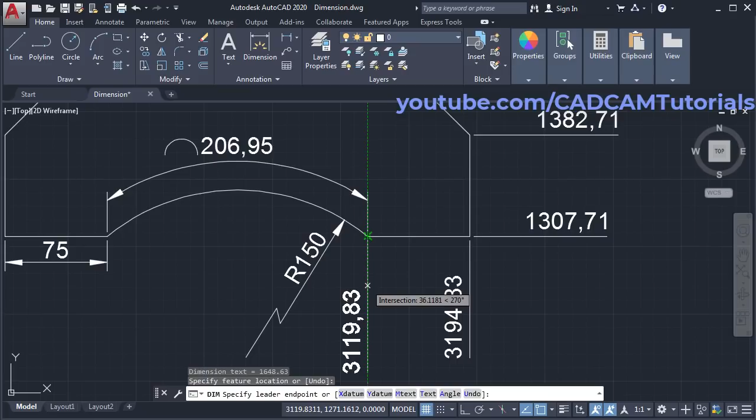Click. Same way I will specify the Y positions here. Take your cursor outside, drag that point and click, and I will place some dimensions here also, then press enter. So in this way you can add ordinate dimension.

Press escape. So these ordinate dimensions are actually the location of the x and y coordinates. Take your cursor on this point, and here you can see the coordinate location is 3195—let me shift it to a more accurate position. So here, x is 3194 and y is 1307, and the 0 position for this ordinate is here, the origin point.

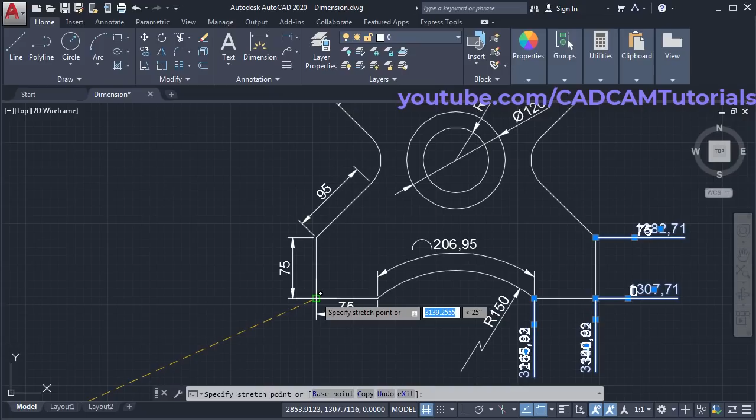And suppose if you want to change the 0 position for these ordinate dimensions, then select these dimensions, then click on this blue grip, then click where you want to specify your 0 position. Suppose I want to specify this endpoint as the 0 position, just click there and press escape. So here you can see that your ordinate dimensions have been updated as per this 0 position.

So in this way you can specify your dimensions using this dimension command. You can also give these dimensions using these individual commands. The procedure to give these individual commands is the same as we have seen with the dimension command—you just have to select that particular command and give the input as shown.

Press escape. Then if you want to give an arrow with text, you will have to use the leader command. Click on leader, then specify the leader arrowhead location. I will click on this midpoint, take your cursor away and click. Then type your text—suppose I will type 'leader trial', click outside.

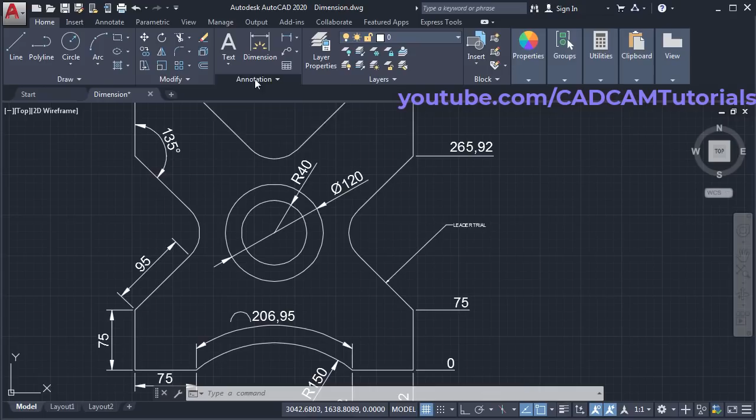Now this text and arrow are smaller. To increase the size of this leader, click on annotation, click on multi-leader style, then click on modify, then click on leader structure, then specify the scale—here you will have to increase the scale, we will make this scale 5. Okay, close. Now the scale for this dimension and this leader is the same, but still the multi-leader size is larger.

Because maybe their text size and arrow size is higher, what we will do is check the size for these dimensions and update the size of the leader accordingly. To check the size of the dimension, click on annotation, then click on dimension style.

If this style override gets added, you will have to delete it because it creates problems later on. Just right click and delete. Yes. Then click on modify.

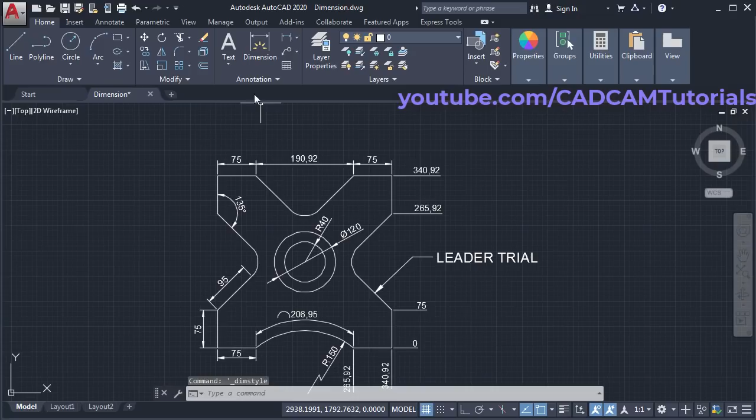Then click on text, so here the text height is 2.5. Click on symbols and arrows, and the arrow size is 2.5. Click on cancel, close. Then click on annotation, click on multi-leader style, click on modify, then click on leader format, and here make the arrowhead size 2.5. Click on content and make the text height 2.5.

Okay, close. Now these sizes are matching. Then to make the settings of your dimension, you will have to use the dimension style command. For that, click on annotation, then click on dimension style. Keyboard shortcut for dimension style is D, enter. Click on it.

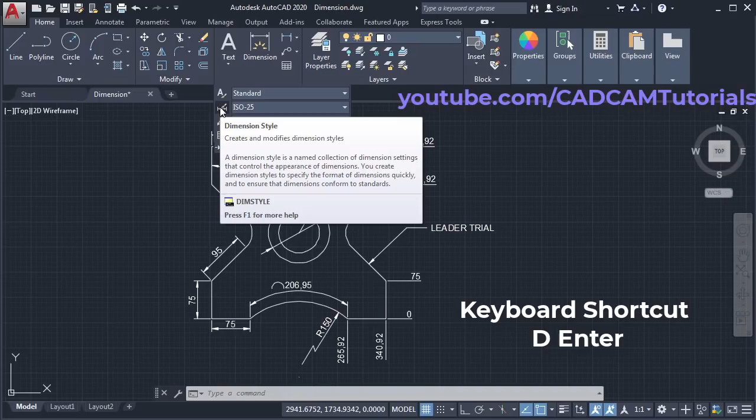Then click on modify. Now dimension is made of 4 elements. First is dimension text, then arrow, then line with arrow is called dimension line, and these vertical lines are called extension lines. We can make settings for each element.

Here now the setting is for dimension lines. From here you can choose a different color for dimension line, you can choose a different line type, and you can assign line weight.

Then if you don't want to see any dimension line, just tick suppress dimension line 1, and that particular dimension line will be made invisible. Same way you can suppress dimension line 2, so no dimension line is visible. If you want to show them back, click here again, so it will be visible.

Then here is the setting for extension lines, these are the lines on the sides. From here you can assign a color for the extension line.

Then from here you can control extend beyond dim lines, that means how much should be the length above the dimension line. That length is called extend beyond dimension lines, so you can specify it here. Suppose we increase it, we make it 3, so it will be visible properly. Click below. So here you can see that this length has been increased.

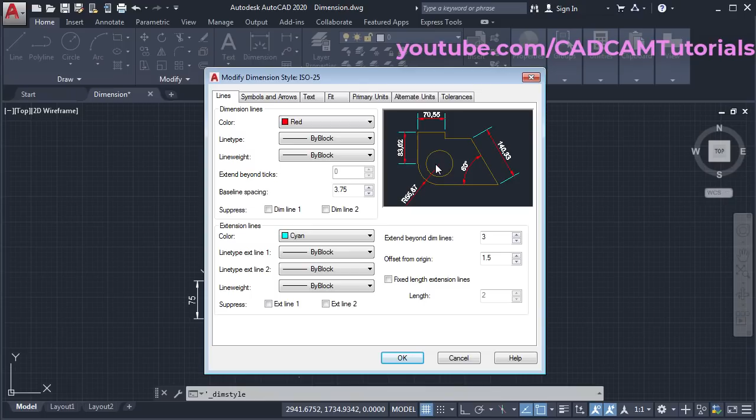Then click on symbols and arrows. Normally close filled arrows are selected by default. Click here, you can choose architectural tick, so it will show like this. If you choose architectural tick, then in the lines section you can specify extend beyond ticks. Suppose I specify 4, enter. Here you can see that this dimension line has come out from the extension line, so this dimension you can specify here. This is only applicable for architectural ticks.

Click again on symbols and arrows. You can also specify dots, or you can specify square filled box. You can specify different arrows on each side for first and second arrow, or you can specify both the same. Normally close filled arrow is used. Then from here you can specify arrow size.

Then click on text, and from here you can choose your text style. If you want to make changes to the text style, click on this 3 dot button. It will bring up the text style window, and from here you can make changes to your text style and your font. And never change this height, always keep this height 0, because we are changing the height from this dimension style. If you change the height here, it will create problems.

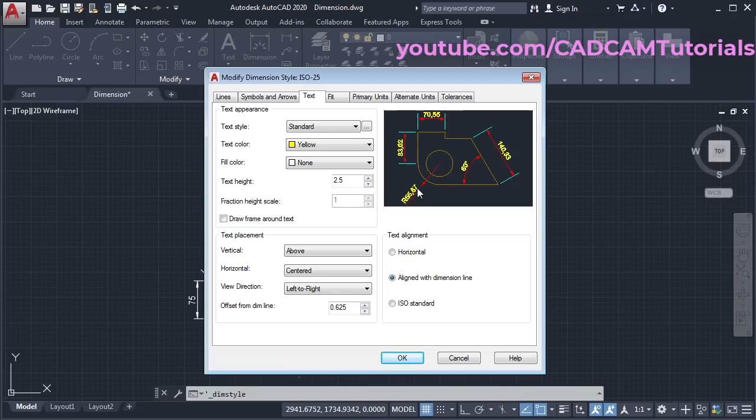And if you want to show this dimension horizontal, you will have to choose the ISO option. Then it will show this radius dimension, or dimensions which are outside the extension lines, those will be made horizontal. Then this offset from dim line is the gap between the dimension text and the dimension line, that is called offset from dim line.

From here you can increase the scale, this will control the size of your dimension. If you don't want to show this internal line, tick here and it will not show. To bring it back, tick again and it will show.

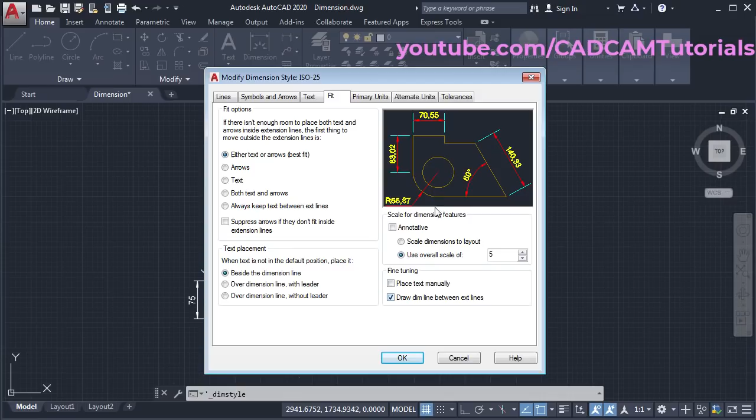Then primary units: if you want to show dimension in feet and inches, choose engineering or architectural. Suppose we choose engineering, so here it is showing dimension in feet and inches. And for architectural also, it will show in feet and inches.

Click on decimal. From here you can control your precision. Suppose if you want 4-digit precision, it will show 4 digits. If you want 2 digit or 0, as per that it will show the precision. Suppose I will keep here 2 digits.

Then decimal separator, now it is using comma. Click here and you can use period also. Then from here you can control unit for angles and angle precision.

If you don't want to show these zeros after the decimal point, you can suppress them here. Click on trailing, so it will suppress zeros after the decimal points. And if you click on leading, it will suppress the zeros before the decimal points.

Then alternate units: if you want to show two units in a single dimension, tick here. Then choose other unit. Suppose I want to show mm and inches, so click on engineering. Now it is showing mm and inches.

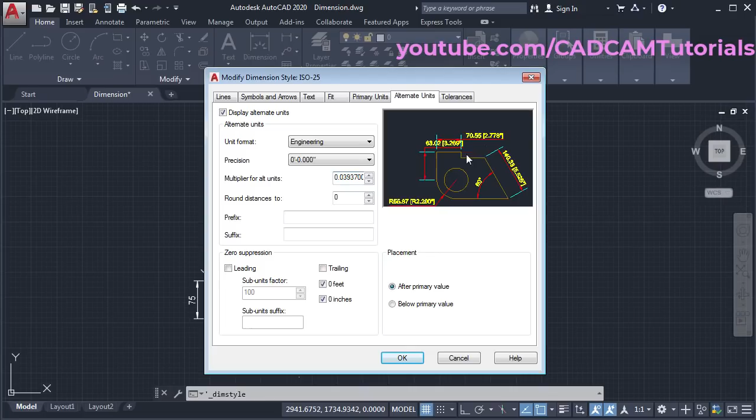Here you will have to give a multiplier for alternate units. Using this multiplying factor, it will create the value for the second unit. So here this value is correct for inches. I don't want to show this here, I will remove this tick.

So in this way you can make settings for your dimensions. Click on OK, click on close. So as per our settings, the dimensions has been updated.

If you want to change the dimension text, just double click on it and type the text. Suppose I want to write here '2 holes 20 dia'. From here you can choose the symbol and delete this other dimension, click outside. So in this way you can edit the dimension text.

Or you can, suppose I want to make it 100. Here only the dimension text will change and the length of the object will not change. Then press escape.

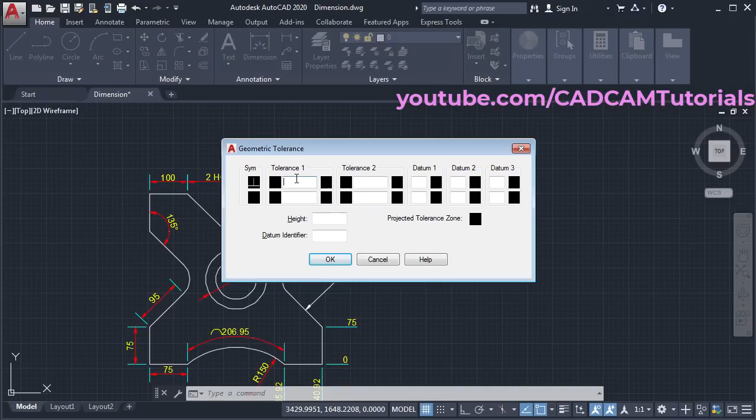If you want to add geometric tolerance symbols, type TOL for tolerance, enter. From here you can choose your GD&T symbol. Suppose I make it perpendicular, then give the tolerance value. If you want to add a diameter symbol, you can add it here.

From here you can add the material conditions. Then here you can add datum. Click on OK, click outside. So here this symbol is created. And suppose if you want to create this datum, we will just erase these dimensions.

Suppose we want to put it here on this line, click on leader, then click on this midpoint, take your cursor outside, click and press escape. Then move this, click on move, select this, enter. To catch the midpoint of this line, press shift right click and click on mid between 2 points. Click on this point and this point and click here. So in this way it has been added for this line.

Suppose I want to define this line as datum A. For that, click here, click on polygon, enter number of sides to be 3, enter, then choose this edge method, then specify first endpoint, take your cursor away, make ortho on and click.

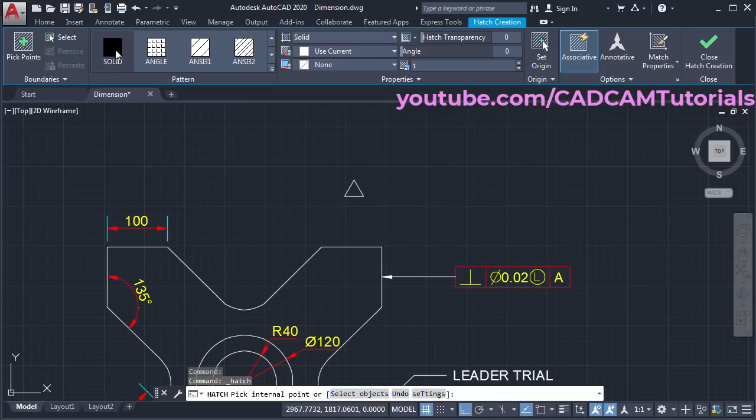Then to fill this triangle, click on hatch, then select solid, then click inside this triangle, click on close hatch creation.

Then move this, move, select this object, enter, then specify this midpoint as a base point and this midpoint as a second point. Then click on line, click on this endpoint, take your cursor above and click.

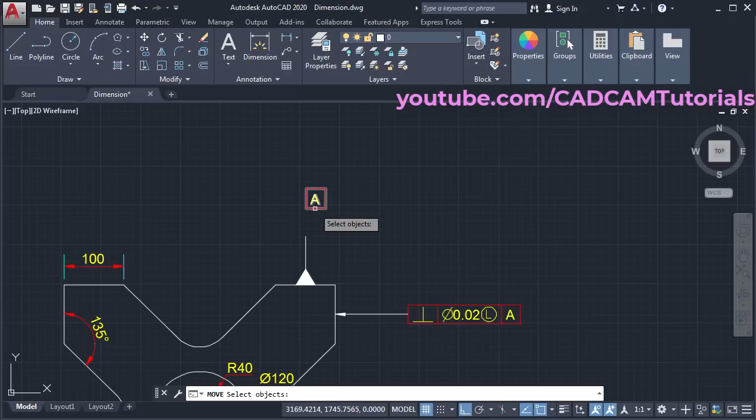Press enter. Then to create the box, type TOL for tolerance, enter. Then in datum 1 type A, OK, and click. Then move, select this datum, enter, click on this midpoint, click on this endpoint. So in this way you can add GD&T tolerance symbols.

So in this way you can use dimension. In the next tutorial we will give dimension to some of the drawings which we have created in the previous tutorials, and after that we will learn the next set of commands and solve exercises on those commands. We will also continue our series for civil, electrical, interior, electronics and chemical engineering. Thanks for watching, we will stop here.